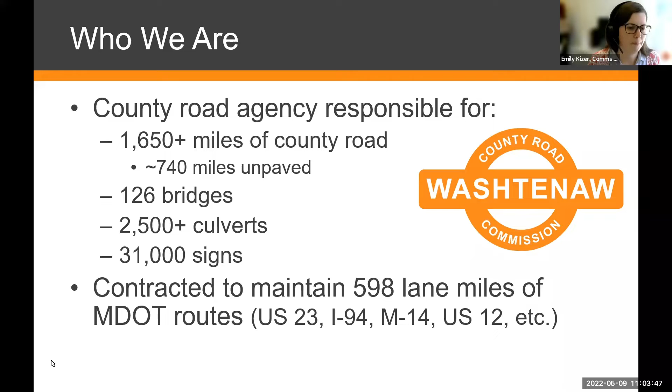Let's talk a little bit about what that maintenance looks like, because today we're going to talk about maintenance, but mostly we're going to talk about construction, which is different. As-needed maintenance in our eyes includes things like pothole patching, which we've been doing a lot of this spring, drainage improvements, and grading of unpaved roads. We are also responsible for storm cleanup, and depending on the year and the part of the year, that keeps us very busy.

Storm cleanup, whether that is snow plowing after or during a winter storm, or if we get a big windstorm or heaven forbid a tornado, we are out there making sure the roads are clear, trying to clear them as quickly as we can to help our emergency responders and anybody that needs to use the roads. Storm cleanup is a huge part of our as-needed maintenance and a huge part of our responsibility.

We also are charged with road hazard removal. For example, if a deer gets hit on the road and the carcass is in the road, we go out and remove it to the side of the road, out of the traveled portion. Or if a tree falls across the road, our crews are going out 24/7 to respond and get that road hazard off the traveled part of the road.

Incident response is also part of our services, and that includes if there is a crash, for example on I-94, or a crash on one of our roads, and emergency responders need help managing traffic, we are helping with that. That also keeps us pretty busy depending on the time of year and what's going on.

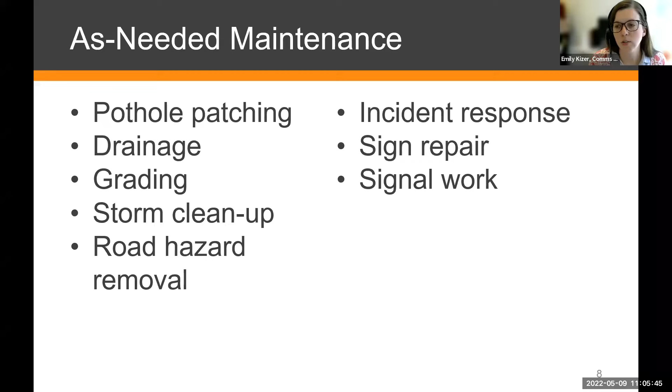So those are really our as-needed maintenance items, as requests come in or as a response is needed. We also have a category of scheduled maintenance, and these are some examples of those scheduled maintenance practices.

We're getting into the season of dust control, which is pictured here. Dust control is an application of liquid brine put on the roads to help minimize dust on our unpaved roads. On our primary roads we do that 3 times a year. On our local unpaved roads it really depends—the number of applications depends on the township, since that's something the townships contribute for, so anywhere from 2, 3, or 4 applications depending on the area and the township agreements we come to.

Roadside mowing is another scheduled maintenance that we do every year. On our paved roads they get mowed twice, typically one pass on the side of the road with a regular industrial mower. We also have mechanical brush mowers that go for more woody vegetation, and that's something we're doing as we can and as scheduled.

Street sweeping is another one of our scheduled maintenance items. We do street sweeping twice on paved curb roads throughout the county, and that's just getting started this time of year as well. On unpaved roads, mowing is done once a year. Typically we start mowing on paved roads, do that first pass, then go to unpaved, then do our second mowing pass on paved roads.

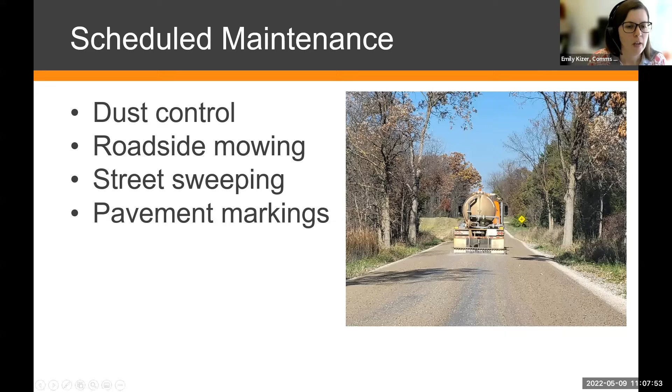And then we ultimately get into construction projects, which is what we're here to talk about today: the 2022 construction project season, already well underway. For us, that involves 6 different types of treatments for roads: pavement preservation, resurfacing, reconstruction, bridges, safety projects, and then other miscellaneous things, which I'll talk a little bit about.

And so we have a nice freshly seal-coated road here on this picture, and we'll talk about what that means. But those are really the categories of construction projects that we're talking about when we talk about a construction season. So let's dive right in.

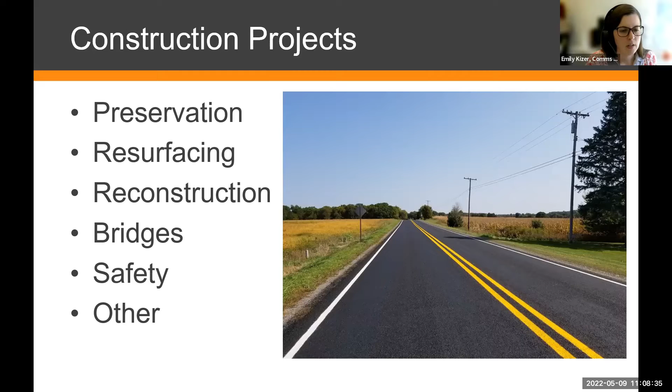The 2022 construction season. First I want to talk about preservation. When we talk about pavement preservation or road preservation, really it's designed for pavement that is in good or fair condition. We often hear when doing this type of work, 'you're working on the wrong road.' I'll talk about that further, but these treatments are really designed for those roads that are in good or fair condition. So it's not that we're working on the wrong road, it's that we're trying to preserve these roads that are in good or fair condition and help extend their life.

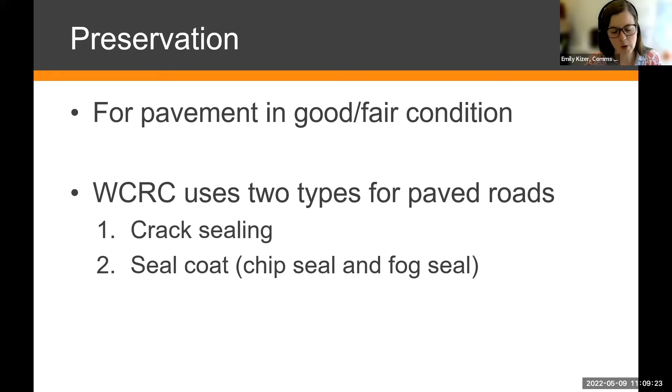To do that, we use two types of treatments for paved roads. The first is crack sealing, and then the second is called seal coat. That involves both a chip seal and a fog seal. I'll talk more about that as we get into these slides.

When we talk about a crack seal, this is a cross section of what it would look like. It's really trying to address those surface level cracks within a pavement. If you look at this picture, the very top layer is the asphalt pavement, and that band of crack seal is really going in and trying to seal those cracks. This is helpful and cost-effective because it helps to seal the road from water. Water and sunlight are big enemies of any paved surface or road surface, so those are things we're trying to keep out and help preserve the life of it. Crack seal isn't fixing anything in the base, and it's not additional asphalt—it's really meant to seal those cracks against water.

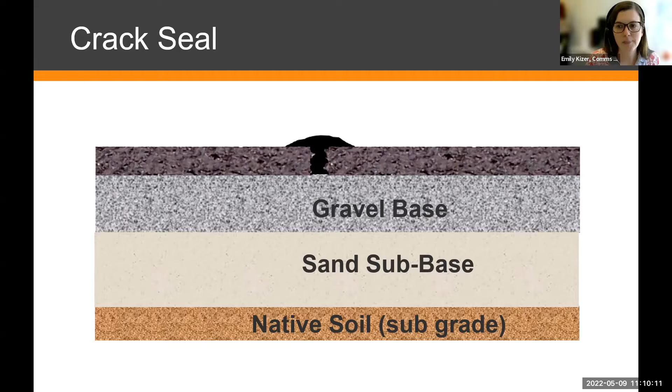A seal coat is slightly different—for us, that means both a chip seal and a fog seal. We're going to start this work next week countywide. Our crews come through and first lay a very thin layer of liquid asphalt on the pavement. Then they come immediately after with chips or stones placed on top with a big piece of machinery—I've got a picture in a slide or two. Those chips are placed on top of that liquid asphalt as the wearing course, the part that you're driving on.

Once we do a chip seal, we post advisory speed limit signs asking people to slow down as those chips start to settle. We do a lot of sweeping right after, before we go to our next phase. There are some stones there, that's why we post that advisory speed. So those stones are one layer, and then we add one more layer.

A couple weeks later, we'll come through and add one more layer of that liquid asphalt, a slightly different mix. That is the fog seal, shown as the very top layer in this diagram, and that really helps to seal in those chips. It also makes the pavement markings really pop and helps further extend the life of that road, protecting it from water and sun. We like to say that seal coat is really like sunscreen for the road, and it really helps to preserve roads that are in good condition.

We try to chip seal or seal coat a road pretty soon after it's been paved. So this year we're going to be chip sealing a lot of roads that we just recently paved within the last year or two, to help preserve that big investment into those asphalt roads. So we've got the seal coat—got a couple more pictures here.

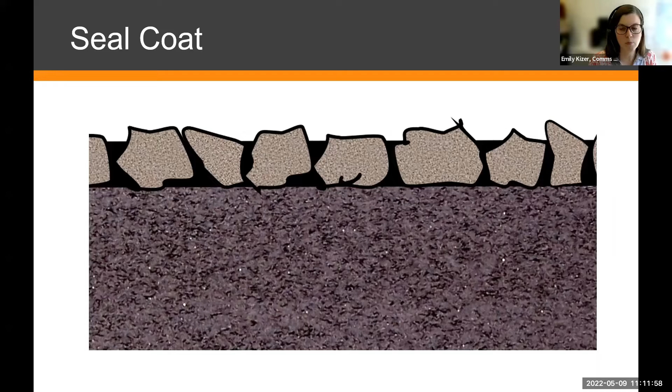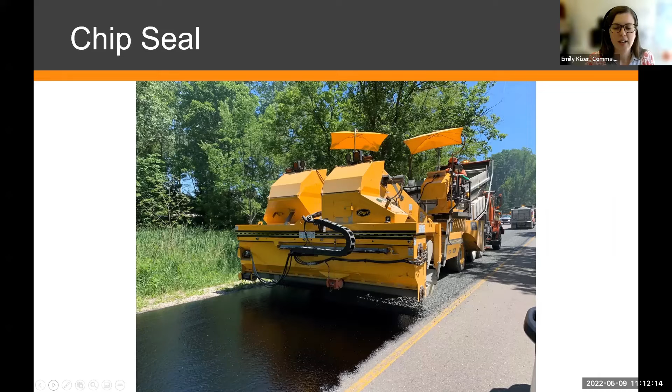This is an example of a picture of our chipper—the machine that's putting down those chips on top of that liquid asphalt that was placed, and it's heading towards us. This is quite the operation when you see it coming down your road.

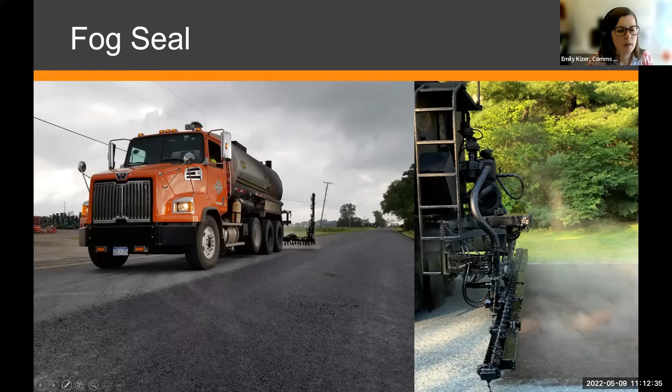With fog seal, we just started doing this a couple years ago. It's really important that you follow directions if you're driving through one of these areas. I'll show you where you can get information about our road updates. We put out a lot of information to help the traveling public know where we'll be working. For these fog seal projects, we often do that under lane closures or a daytime road closure, depending on the road, so sometimes cars can drive through there.

So just a quick note on fog seal: if you see this, please follow the instructions. We're doing it out there not to be annoying, but because there's a reason we're flagging and guiding traffic the way that we are. So we just ask for patience when you come upon us.

The total plan for this preservation part of our program is to chip and fog seal that overarching seal coat for about 100 miles this year, which is a lot. We're going to be starting next week, weather pending, and it'll take until mid to late July, again very weather dependent, to get that whole program done where we'll chip seal everything and then come back around and fog seal that 100 miles again.

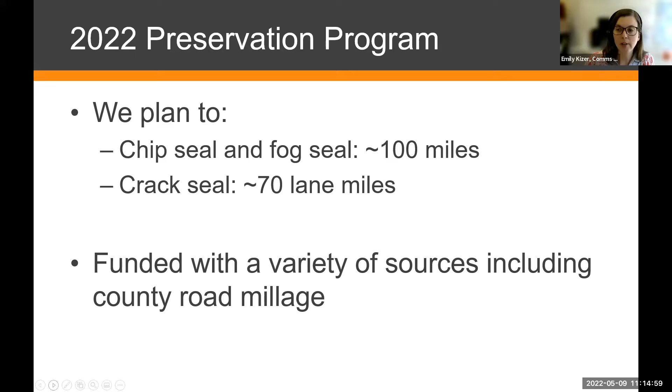This work is funded through a variety of sources, including the county road millage that was renewed by voters in 2020. If anybody has questions about that, we're happy to talk about the millage, but that has been a really great way we've made a lot of progress on our primary road system in particular.

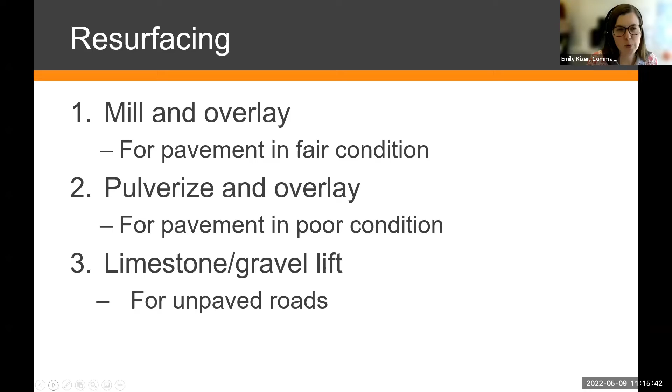Then we get into resurfacing, and there are really 3 different types when we talk about asphalt roads. You can mill and overlay, which I've got pictures and diagrams to show you. Mill and overlay is designed for pavement that is in fair condition. Another treatment is pulverize and overlay, designed for pavement in poor condition. Remember I mentioned that almost half of our system is unpaved - the third type is a limestone or gravel lift, designed for unpaved roads, and it's slightly different since they're not paved. So we'll talk about each of these 3 types of resurfacing.

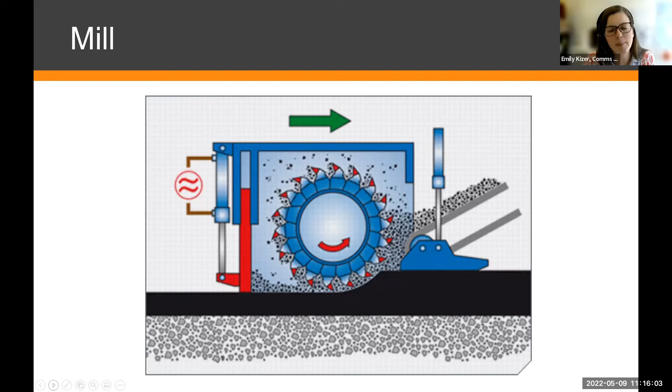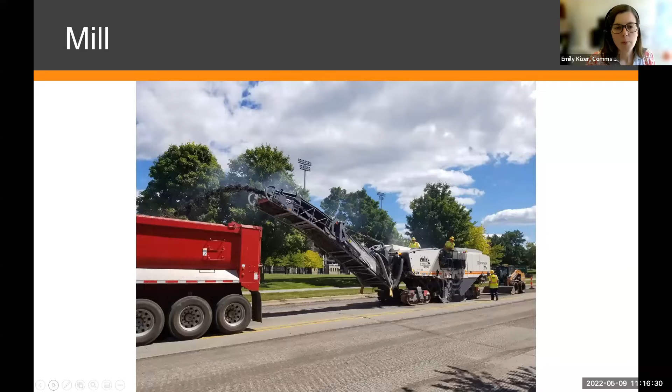So then as part of a mill and overlay, we'll come through and put a top layer, and I've got a picture of that in a slide or two.

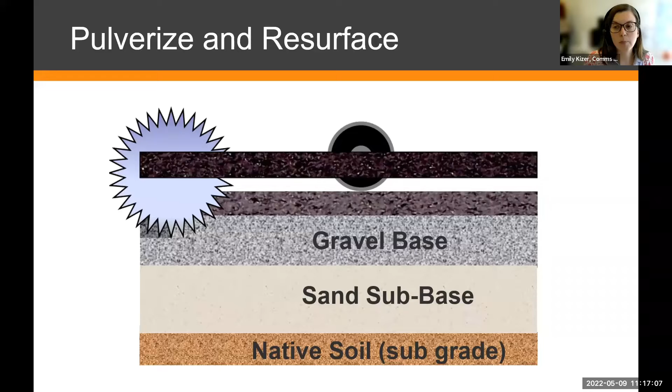We are planning to do—oh wait, let me go back here. We already have some roads that have been paved. We just reopened Moon Road, which was a pulverize and resurface project. We opened that on Friday. So our paving season is already well underway, even though it's early May. We are making progress already.

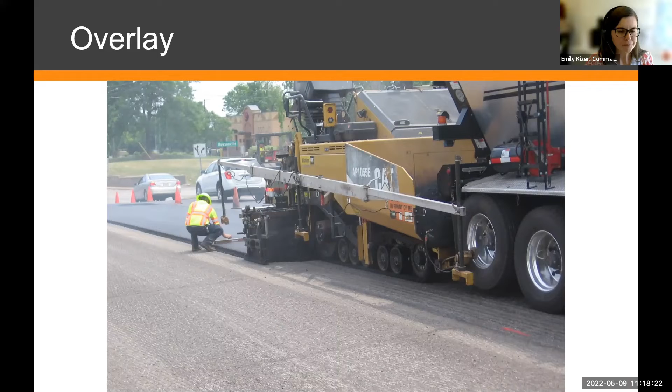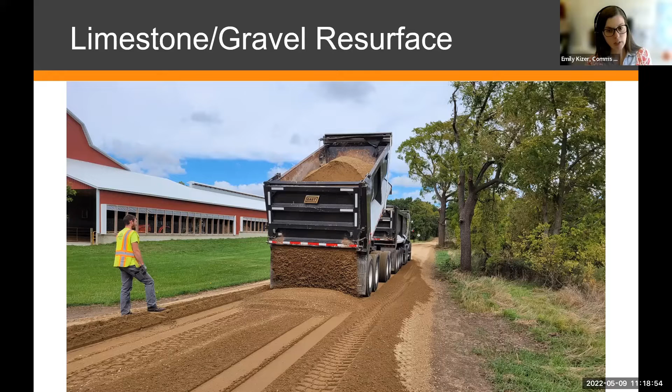So with a limestone or gravel lift, as you can see in this picture, they're adding a lot of material. In our next picture, you'll see a grader comes through and grades the road. We'll apply dust control, that liquid brine. Really it's meant to raise the road up and get the water off of it. We add a crown to it, and it gives us material to work with through the whole year as we're shaping unpaved roads throughout the year. This is a less expensive treatment than paving a road, for example, but it still requires a significant investment. So limestone and gravel is another type of resurfacing that we do here.

So this is our planned program for 2022. We're planning to resurface about 30 miles of asphalt road, and then we're planning to do limestone gravel lifts on approximately 55 miles.

These are funded through a variety of sources, including revenue from federal and state fuel taxes, the county road millage, townships. Road funding is a complicated tale, so we're happy to talk more about that if you have specific questions about a specific project or types of road funding. But in general, we are very good at spending all the money that we can find—it's a matter of not enough money to make all the improvements we'd like to make. But this is our plan for this year.

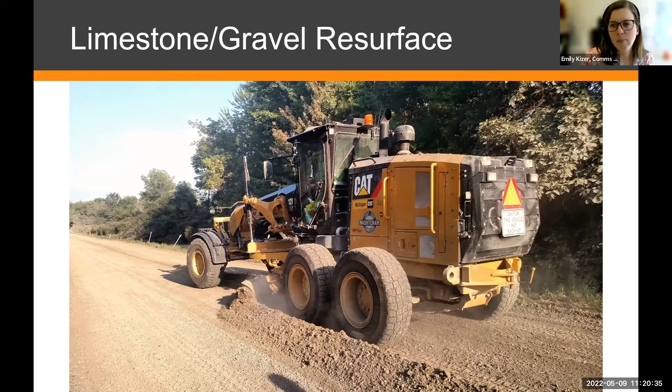Before we move on, I just want to mention one thing about limestone and gravel resurfacing. We're really raising the road, so we often get calls from residents whose driveway no longer meets the road because we've now added 6 to 8 inches of limestone or gravel. That's something just to be aware of. That's up to the responsibility of that property owner because it's their driveway. But that is something to keep in mind as we are talking about unpaved road resurfacing projects.

Okay, so that's our resurfacing program. Then we get into reconstruction. So as we were talking here today, we started out with the most cost-effective preservation projects, the least expensive, crack seal, seal coat, and then we get into our resurfacing. Those are much more expensive than preservation, but middle of the road compared to something like a reconstruction.

Reconstruction is removing all the pavement to the base or sub-base of a road. It's correcting drainage problems, sub-base problems. It's really designed for roads that are in poor condition, if we're paving an unpaved road that's never been paved, or doing major intersection improvements. As you can imagine, reconstruction is very expensive. To pave a mile of unpaved road, we're seeing anywhere from $1 million to $1.5 million plus per mile.

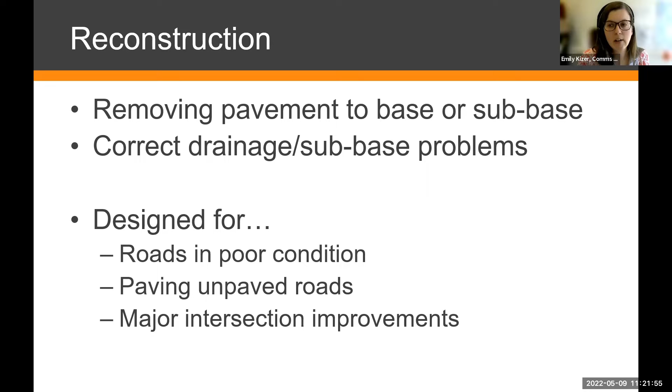So we don't do a ton of reconstruction. Most of our work is done through preservation or resurfacing. But we do some. Over the last couple of years, we've been working to pave sections of Zeeb Road, an unpaved primary road in Lodi Township and Scio Township. But this year, our reconstruction is going to be about intersections, so we have 3 roundabouts going in Washtenaw County this year on county roads.

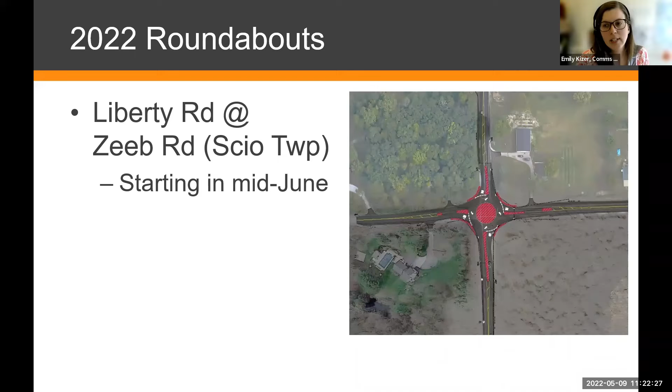The first is at Liberty Road at Zeeb Road. We just had a virtual public meeting last week to talk about the construction schedule, and this one will start in mid-June. Whenever we do a roundabout project, it is a full closure, so the Liberty at Zeeb Road roundabout will be closed for approximately 8 weeks once construction starts. It's a single lane roundabout going in there.

We also have a single lane roundabout going at the intersection of Pontiac Trail and North Territorial Road in Salem Township, also planning to start in mid-June. We'll have the construction information meeting for that one in early June. We're working on sending out that information, hopefully today, about the dates. We sent letters last week to impacted residents right there. So we've got these 2 big roundabouts, projects the Washtenaw County Road Commission is administering this year.

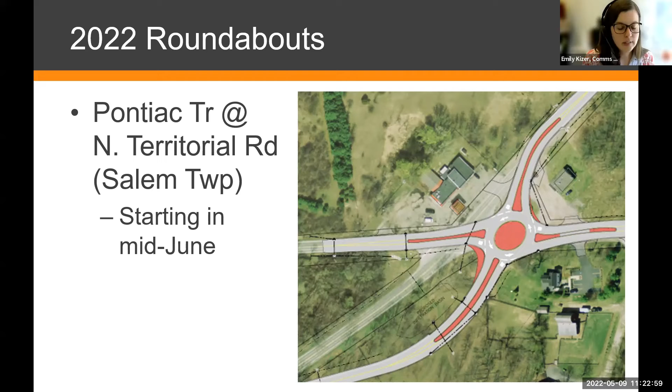There will be a roundabout built at the intersection of 8 Mile Road and Currie Road, on the border of Salem Township and Oakland County. That is underway now, the project started in mid-April. There's a huge project planned by Oakland County along Currie Road, including 8 Mile and 9 Mile Road, so there's a lot of construction going on up there, but the part that impacts Washtenaw County is this roundabout at 8 Mile and Currie Road.

That project is administered by the Road Commission for Oakland County. We are contributing to the intersection project on our border, but the rest of the project is being administered by the Road Commission for Oakland County. So we've got those roundabouts, and those are all considered reconstructs. We've had construction information meetings, or we will have, about each of these. If you want to learn more, we'd really encourage you to check those out, and I can show you where to find more information on our website.

As I mentioned at the start, bridges are a really important part of the assets we manage here at the Washtenaw County Road Commission that we own. We own 126 bridges throughout the county, and they are in a variety of conditions: good, fair, poor. By law, we inspect our structures, our bridges, at least every 2 years. We have a range of treatments for bridges based on funding availability and need, ranging from deck preservation to full replacement. Last year we had a couple bridges that we were able to replace.

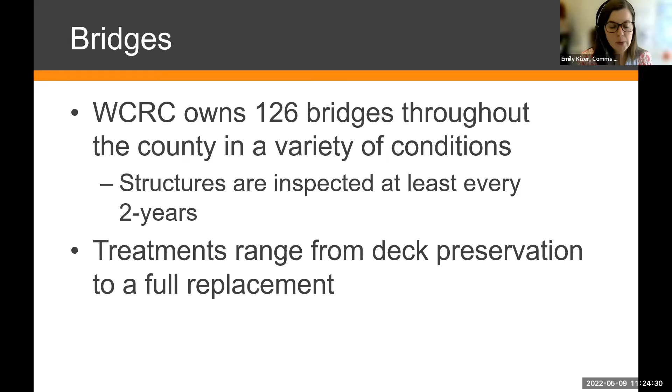This year, in our 2022 bridge program, we have 2 big rehabilitation projects. We will be closing East Delhi Road Bridge in Scio Township for about 2 weeks, and we'll also be closing the Maple Foster Road Bridge in Ann Arbor Township for about 12 weeks. Those projects will start this summer. We're going to be spot repainting on East Delhi Road, and totally repainting and doing a lot of other things on Maple Foster Road bridge. These are historic 1-lane steel truss bridges, unique to this area, and I think unique to the state.

They require a full closure for us to work on them because they only have that one lane of travel. We just held a public information meeting about these projects a couple weeks ago. These are our two big bridge rehabilitation projects planned this year for construction or rehab. The goal of this painting project is to help extend the life of these bridges. They're over 100 years old, so they need regular maintenance to stay in the condition they are.

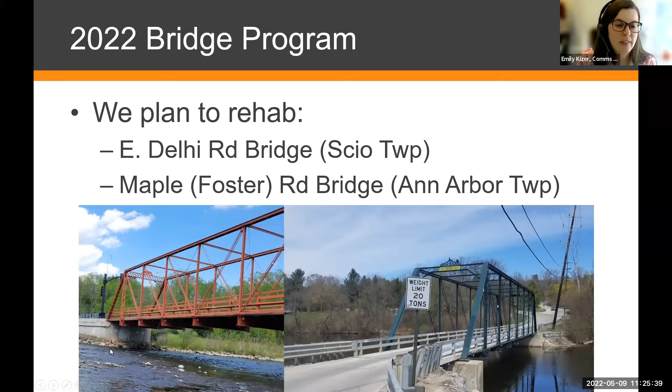We inspect the larger structures at least every four years, so that's an ongoing inspection process on these bigger culvert structures. In road world, anything under 20 feet in span is considered a culvert, anything over that is considered a bridge. That's the magic number when we're talking about road structures.

We have a lot of culvert projects planned, and they are of various sizes. We're happy to talk about specific questions about culverts and where we'll be working. We have a few of the big ones on our project map that I'll show you, but there's a lot of culvert projects planned this year. We've actually already completed a few into the season. So if you've got questions about culverts, we'd be happy to talk about that during the Q&A.

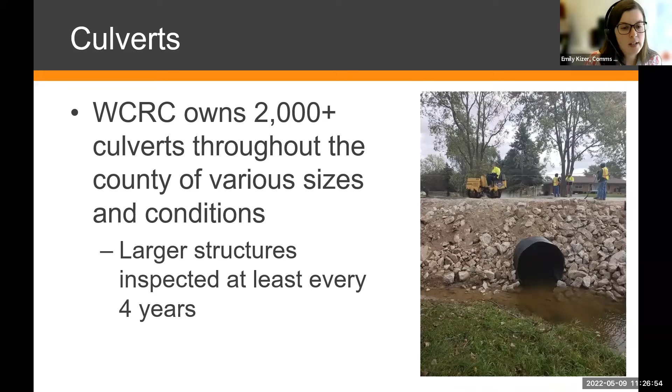Another really important asset that we manage is our traffic signals. When we're doing construction type work on our traffic signals, it's a couple different things. It could be a new signal going in where there wasn't one before, or it could be upgrading the signal depending on the technology or configuration—it can be a different type of upgrade.

We're also placing flashing beacons in a couple spots to help draw attention to the intersection, whatever it is now—whether it's a 4-way stop or a 2-way stop, those flashing beacons help alert people to the intersection. These traffic signal projects are funded from a variety of sources, including revenue from federal and state fuel taxes, county road millage, townships—a variety of sources.

On our traffic signal program, we're putting in new traffic signals where there hasn't been one before at Pittsfield Township—this is at Lohr and Textile Road. I believe that work is ongoing right now.

We'll also be placing one at the intersection of Bemis Road and Carpenter Road. This is a project we actually started last year. We've seen a ton of carryover work, especially in our traffic signals, due to a lot of different supply issues. So we did some intersection improvements at Bemis and Carpenter in preparation for the traffic signal last year, also paved sections of Bemis Road, and we'll complete that work this year. They're getting very close to having that one done and that traffic signal operational.

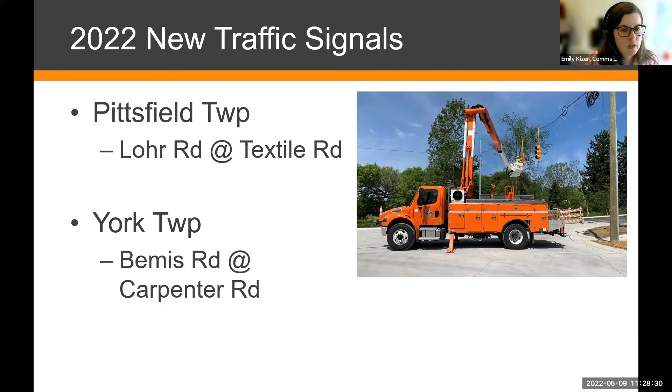So we've got those two new signals. We're also upgrading two existing signals—one at Ann Arbor Township, which is Dixboro Road at Plymouth Road, and one in Pittsfield Township, which is Textile Road at Maple Road. Both of these projects we were hoping to do last year, but they've been carried over into 2022, again due to those supply issues. But we're getting closer. If you've got questions about these, we'd be happy to talk about either one during the Q&A period. But those will be upgrading those two traffic signals.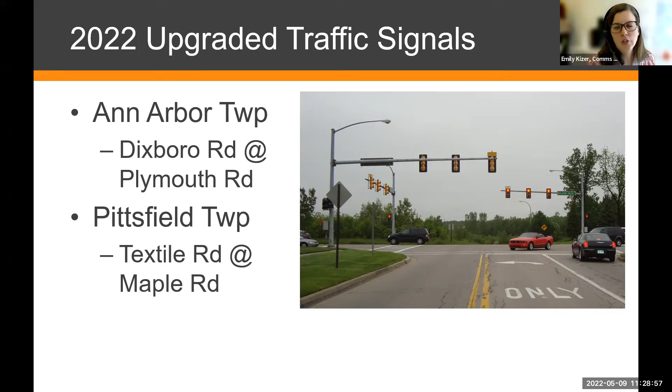We also will be installing new flashing beacons. We've got one going in at Schneider Road and Bethel Church Road in Freedom Township, and another one going in York Township at Platt Road and Willow Road. Platt Road is closed right now for a paving project, and in conjunction with that work, depending on supply, those flashing beacons will be placed this year in the construction season. We've got a picture of one here on the slide as an example.

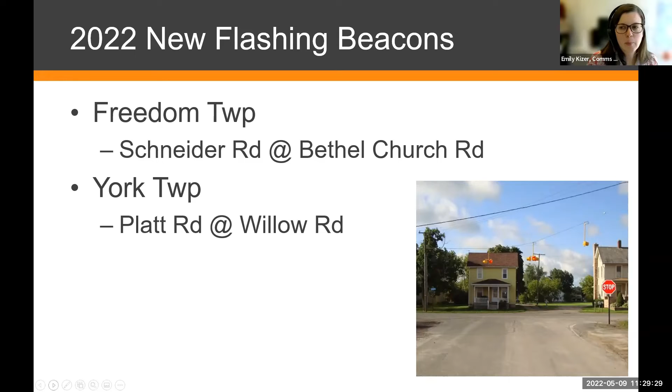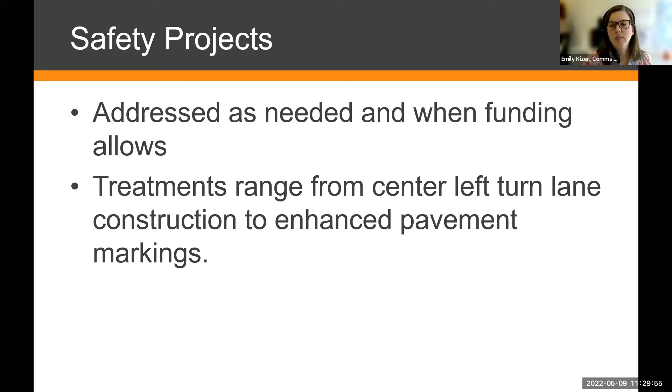Another type of project or funding source that we work hard to bring to Washtenaw County are safety projects. We use a safety project as needed and when the funding allows. Treatments for a safety project can range from installing a center left turn lane to enhanced pavement markings to a roundabout. There are a lot of different types of safety projects that could potentially be funded by grants.

So in 2022, we do have a safety project on Dexter Town Hall Road in Dexter Township, and that will include a couple things. Most notably, it'll include a high friction surface on the curves to try to help keep the traveling public on the traveled portion of the road. We'll also do some enhanced curve signage there to try to help improve the safety along that corridor. This project is funded by a federal and state safety grant that we received.

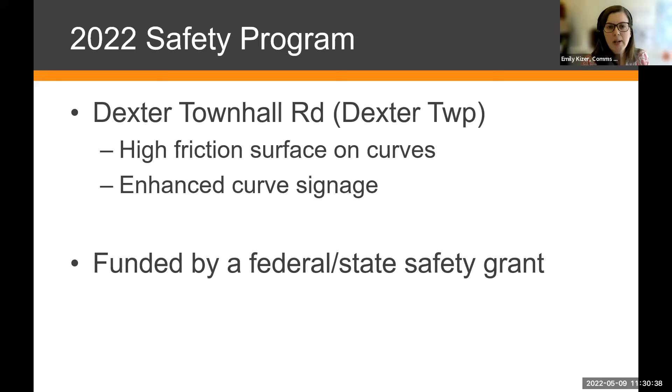Our staff are very good at hunting for grant dollars, and these are all competitive grants that we have been awarded and are bringing these funds to Washtenaw County. We've been very successful at implementing these safety projects over the last decade or so. So we're excited about this one.

There's a lot of other projects that we have planned as well. As an Act 51 agency, we can receive federal funds, and there's a program called the Transportation Alternatives Program, the TAP grant, which is for non-motorized projects. We partner with different townships or the Parks Department, the Parks Commission to help administer those. It's not that road funding is going to these projects, but we're involved just from a paperwork standpoint. So these are some of the non-motorized partner projects.

The Dixboro Road Pathway started last year and ran into some of those supply issues. It's mostly done, but we're getting closer to the end of that. Huron River Drive and Platt Road Greenway are all under different stages of construction or design.

Some other miscellaneous projects under our purview: we do a lot of guardrail replacement. You can see in this picture guardrail replacement on M14. Our crews, and we also hire a contractor to help with guardrail replacement, are putting new guardrail where there hasn't been some before, and most of it is replacing guardrail that has gotten damaged. We've hired a contractor to do a lot of this work this year, and actually most of their work has been wrapped up for the year, which is great. They were able to get out there early this spring and even in the winter to get some of that work done.

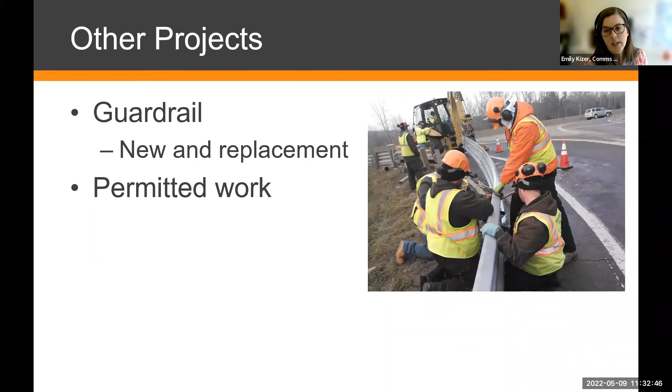So that's really an overview of the season. I know we're giving you a lot of information. We will share all the ways that you can find out more about each of these things as we go through this presentation. But one of the main questions that we get when we talk about a construction season is really how are projects selected. I mentioned at the start, sometimes we hear, hey, you're fixing the wrong road, or why are you doing this road, what about this road?

So we just wanted to talk briefly about how projects are selected. Matt, Jim, or Brent can talk a lot more about this if you want to get into the nitty gritty. We'd be happy to help you with that during the Q&A or even after the meeting too.

Essentially, our strategy for picking projects is that we're really trying to focus on preventative maintenance. So we are trying to apply the right fix at the right time in the right place. Much like you would maintain your car or your house, there's some type of maintenance that is low expense, maybe an oil change. If you don't do those low expense things over time, you'd need to replace your whole engine. Or if you're maintaining your roof, as it ages, eventually you have to replace the whole thing. So we're really trying to find the right fix and help preserve those roads in good or fair condition, then work our way through that maintenance schedule. That's really the thought process, just the idea of preventative maintenance.

Let's talk a little bit about scheduling. That's another question we often get: when are you going to be here? Why isn't it done yet? Just a lot of questions about scheduling. Typically in Michigan, the construction season runs from mid-April through mid-November. It's very weather dependent and very temperature dependent. We need both dry road bases and consistent warmer temperatures to conduct most of our work. A lot of what we do, especially bridge work, is subject to pretty strict environmental restrictions, which can impact when projects start or take place. There are off-season projects that occur, but they present a different set of challenges. So the vast majority of the construction work we're talking about — preservation, resurfacing, reconstruction — takes place during this mid-April to mid-November window.

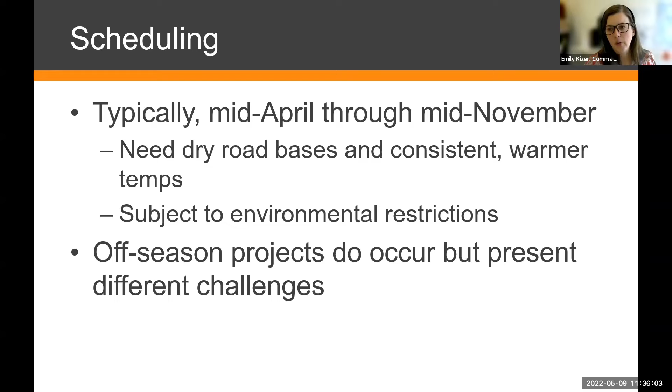Another thing to mention about scheduling is that it is very weather dependent. I've probably already said that 10 times today, and I will continue to say it, but our work is very weather dependent. For example, rain will delay paving, it will delay seal coat. There are some things we can do in the rain, but paving is not one of them. We do our best in the communications department to put out information ahead of time, but if it rains, schedules — all bets are off. So we try to strike that balance of informing the public while also staying flexible to get the work done. Very weather dependent.

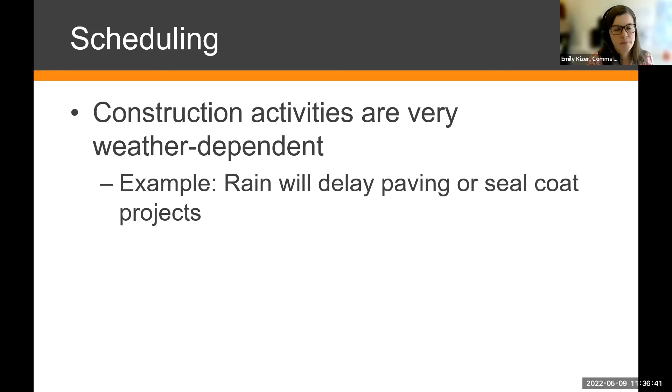It's also complicated — there are a lot of moving parts when it comes to scheduling. There are environmental restrictions or considerations, as I mentioned. There are utilities buried underground or overhead that need to be relocated ahead of our work, or at least located ahead of it. We have to coordinate with other projects — we're not the only municipality doing road work, so we try our best to coordinate. Road work requires specialized equipment that can break down, and if a paver or a pulverizer breaks down, it can throw off the whole schedule for a bit. We're also seeing supply challenges — over the last couple of years it's been an unusual couple of years, to say the least, and we're seeing supply challenges, for example on our traffic signal projects. So there's a lot of moving parts behind the scenes, not as simple as just sending a crew out to do something, and a lot of it is weather dependent, as I said again.

So when we talk about scheduling, I'll show you where you can find out more and how we share information about what we have planned that week, but you should read everything with a big caveat because of that weather dependency. So let's also talk about work zone safety, and I promise we're getting closer to the Q&A period here.

But work zone safety is a topic that we cannot stress enough. In 2020, which is the latest year that data is available, there were 14 people killed in work zones in Michigan, and there were a couple killed here in Washtenaw County. Fortunately not Washtenaw County Road Commission crews, but a life lost is a life lost. So there were 14 in 2020, and there were so many more near misses. This is a really important topic. It's not just about us, it's about all of us getting home safely every day.

I think it's tempting, I'm a driver as well, to think, oh, that must not apply to me. Like, I think I can get around, or they must not really mean it. But if the road says it's closed, it's really closed, and it does apply to you. So please abide by these. If you live within that area, that's a small exception, and we will get you to your house. But if you see a road closed, it applies to you.

And we're doing that, again, I can't stress this enough, we're doing that to protect ourselves, but also to protect you as the motoring public. And we're trying to get this work done as quickly as we can. There's a lot going on. We understand that. People get frustrated, but they also get frustrated when the roads aren't fixed. So we're trying to fix them with as little pain as possible, and we all want to go home every night as well. So please abide by these road barricades, road closures, as you see them, or lane restrictions, whatever the signage may be.

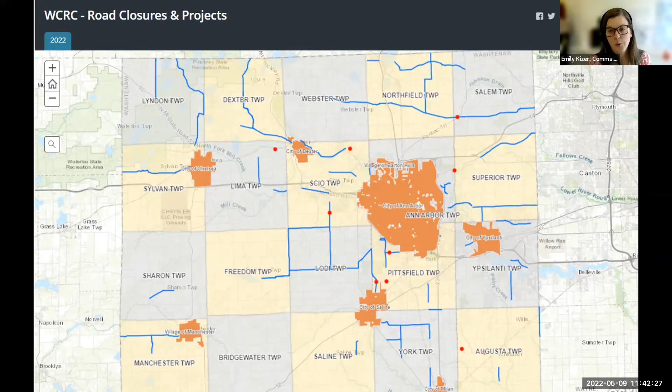We also put out on our website a weekly roadwork schedule. Every Thursday, we put out a schedule that includes major projects that impact traffic. It's posted to our website at wcroads.org, it's emailed to anybody who has subscribed to receive it, and it's also posted to our social media, Facebook and Twitter.

We also have office hours, so anybody with questions is welcome to reach out to us. Right now we're on our summer schedule, which means we're open Monday through Thursday, working 10-hour days, 6 a.m. to 4:30 p.m. You can always call us during those times, and if you want to leave a voicemail after hours, we'll get back to you. This is our main line, and our team can try to help answer your questions.

We also have an app called WCRC Fix-It, where you can submit a service request. You can download the app through our website, or you can also call us, and when you put a request in through the phone, we'll put it through the same system, so they're all in one spot.

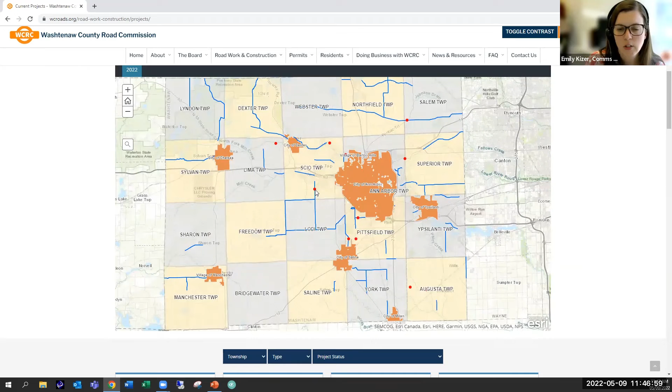You can also click here to subscribe to receive project updates. So if you're interested in learning more and wanting to learn about the construction throughout the process, you can do that on that project. We also offer road advisories that are more general.

So if you're looking for advisories on things going on in Ann Arbor Township, just road work going on, you can click here and just get information about Ann Arbor Township. If you love roads as much as we do and you want to know about everything we're doing across all 20 townships, you can do that too.

Like I said, there's a lot of great information on the website. We also have information about our board here, about how to find out how to join a board meeting, where you can see our meeting agendas and meeting packets. All that information is available on our website.